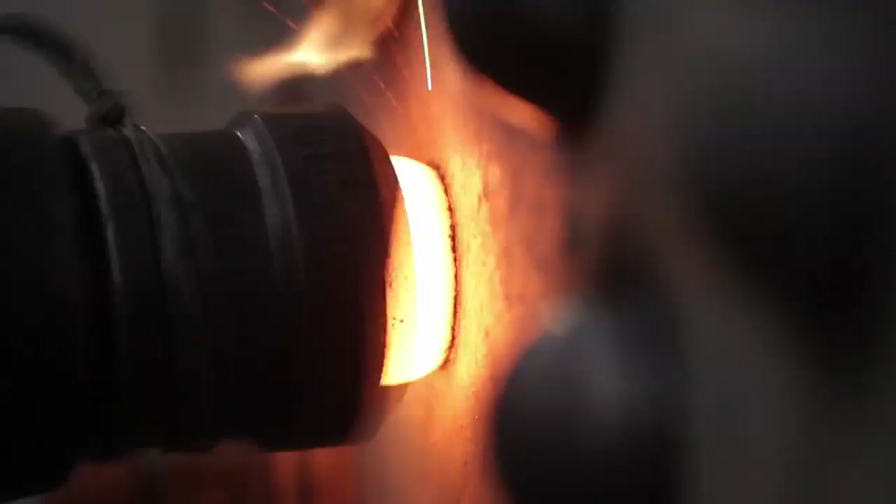But for any change to happen, you need a vision fueled by an ambition. Because everything happens twice, first in the mind and then in the world outside.

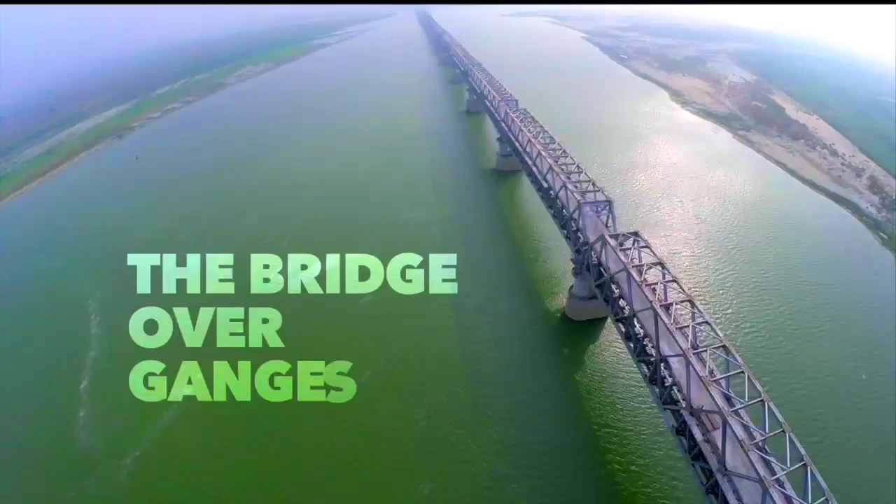The river Ganga, ancient, revered and sacred. Originating from the Himalayas, it reaches the plains, flowing merrily as it meanders its way through the Gangetic plains. By the time it reaches Bihar, the Ganges basin has extended to about 700,000 square kilometers, and the river becomes a wide giant that separates the state in two.

With the passage of time, this divide has led to an unequal distribution of resources and opportunities in the state of Bihar. For economic potential to be tapped to the fullest, the need to bridge this divide has become critical.

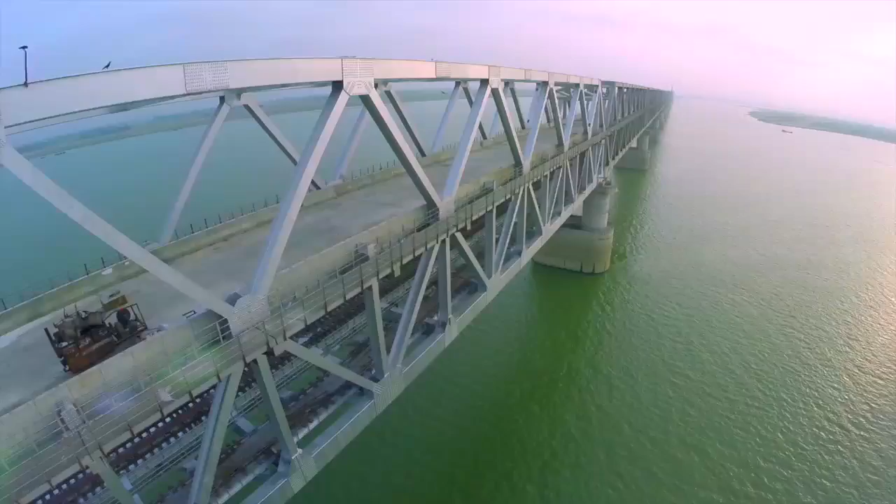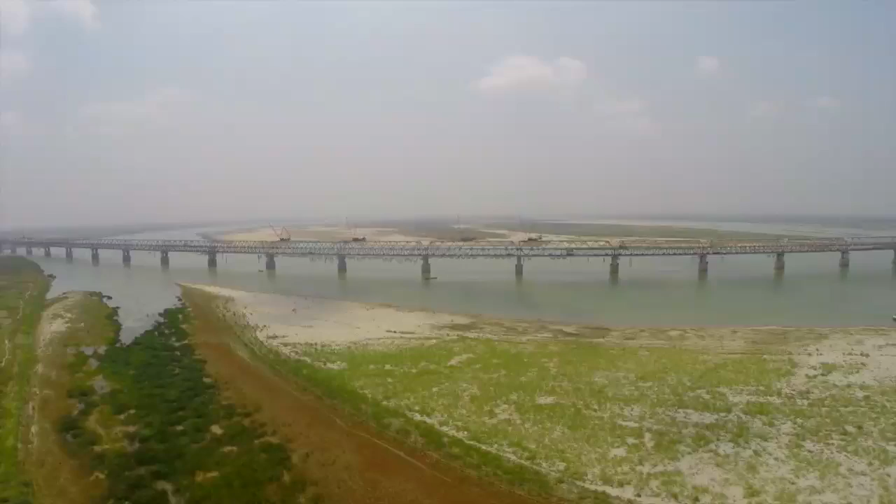36 spans of 123 meters, along with 2 shore spans of 64 meters each, and 2,200 tons of steel in each of these spans and 100,000 rivets. This is the longest and the heaviest superstructure on Indian Railways.

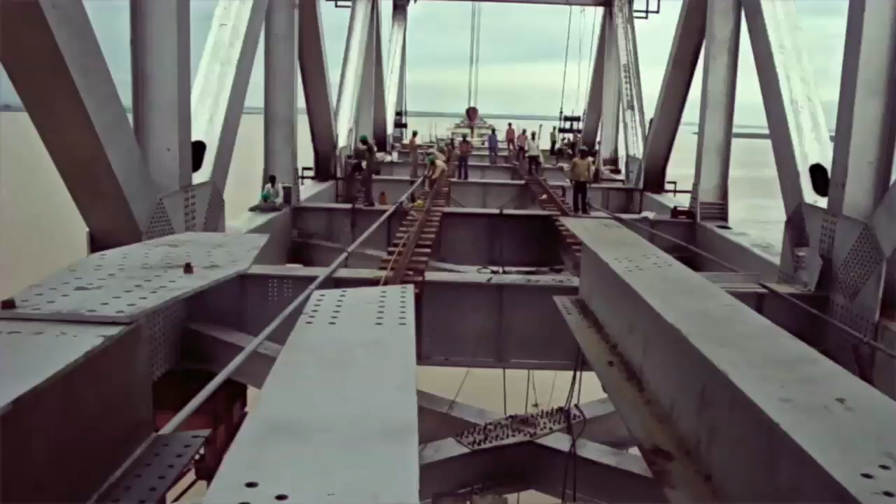The erection of the superstructure started in September 2010. Floodplains were reclaimed with boulders and earth filling to construct the first anchor span. And within a span of 4.5 years, all 36 spans of 80,000 metric tons of steel were mounted over River Ganga. This 4.56 kilometer bridge is Indian Railways' longest truss bridge.

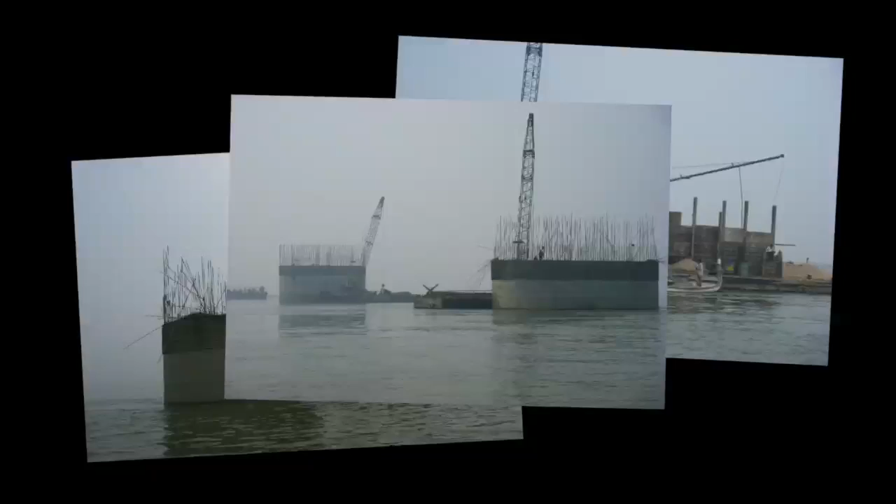The foundation laying had already begun in 2002. It was decided by the ministry to add a roadway above the railway track. By that time, the foundation and the substructure were already complete.

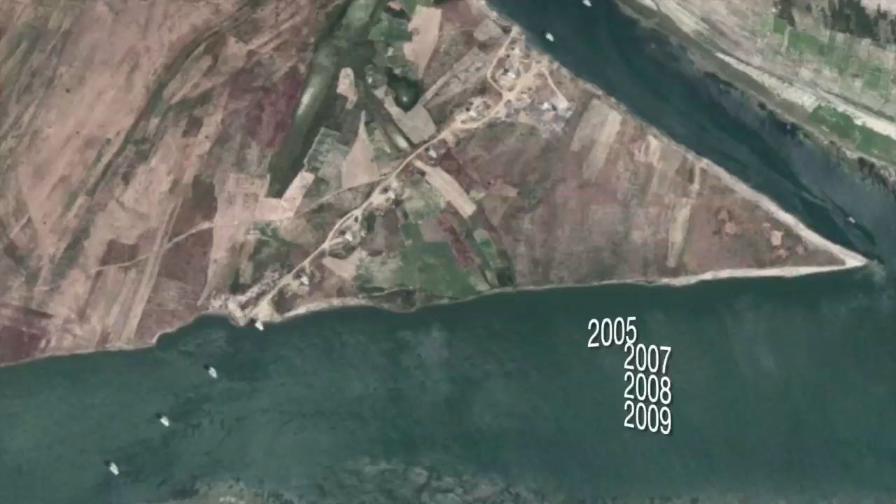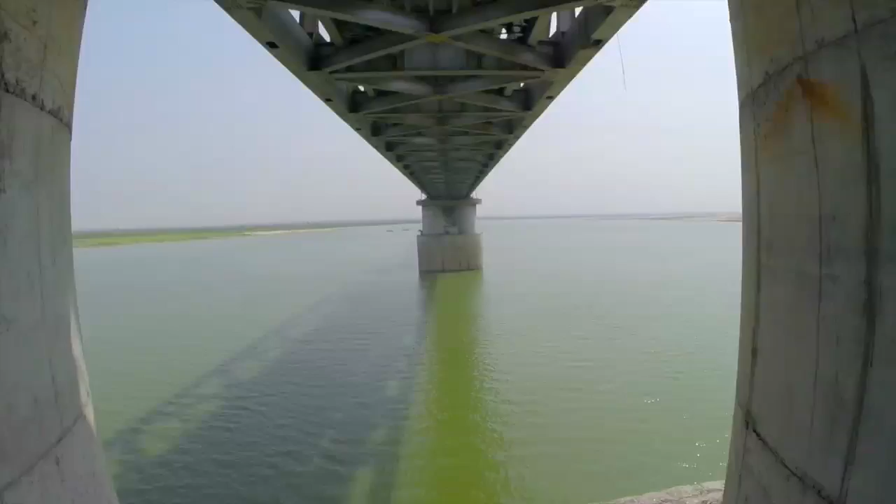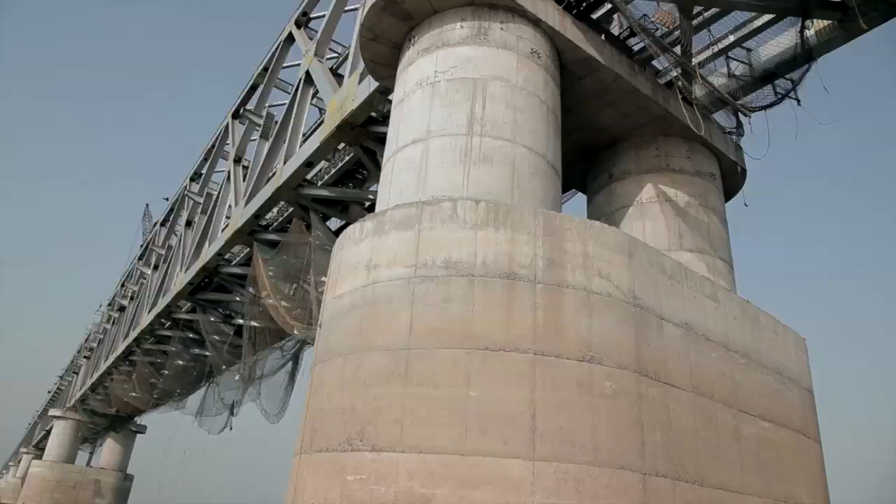This is the foundation portion, which is in the shape of a well, and the well is like this, in the shape of double D. We have twin circular piers of outer diameter 5.5 meter, having concrete thickness of 0.8 meter. Now the founding level is -8, so the total depth is almost 60.5 meter, which is equivalent to a 17-story building.

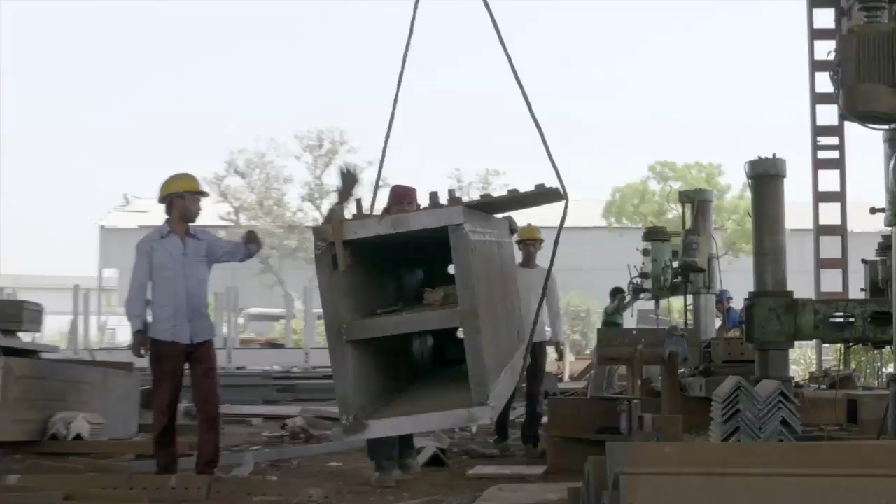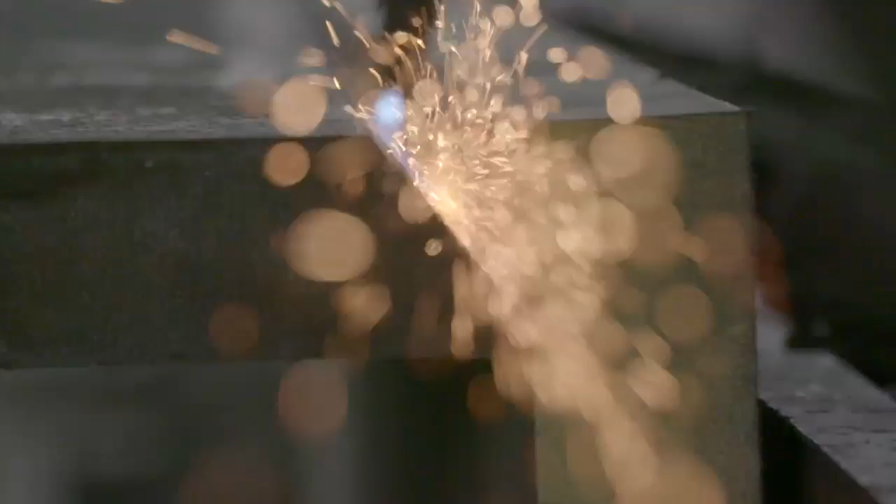To optimize the steel work, we had to go for higher grade of steel E450, so that the overall tonnage of the steel could be reduced and the dead weight of the superstructure could be reduced. But nonetheless, we had to use members as thick as 62 millimeters. Fabrication with 2.5-inch steel plate was itself a task.

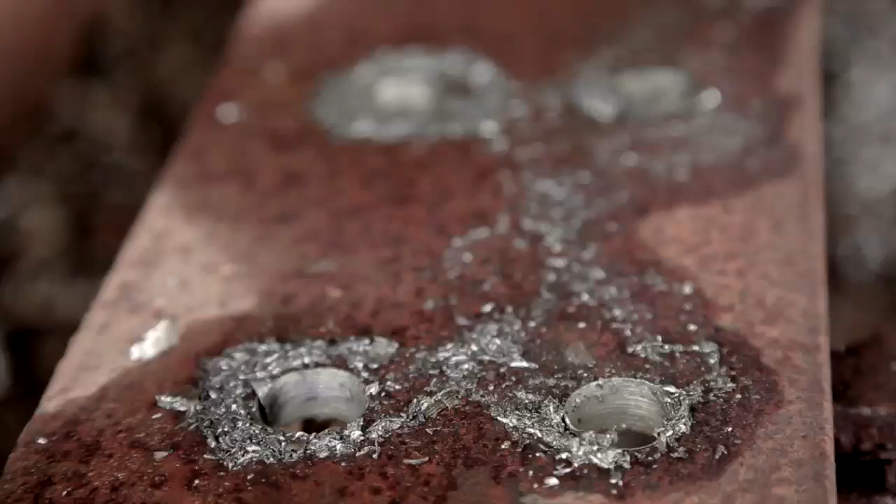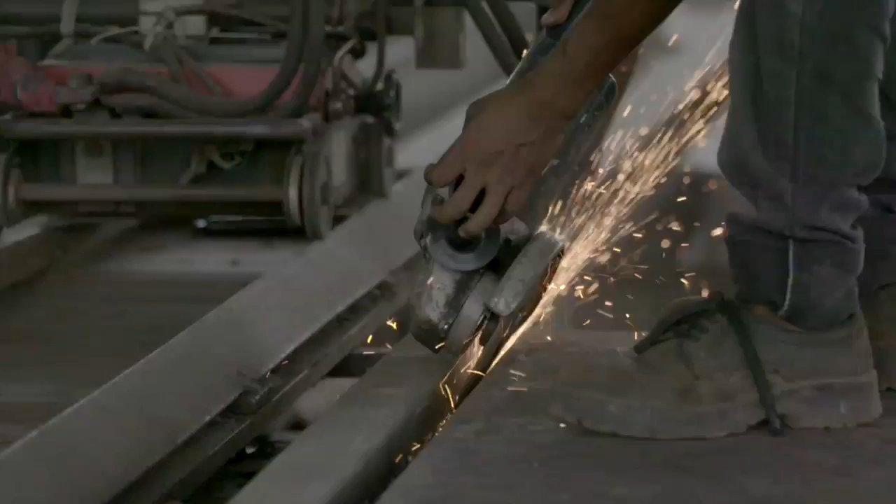Special radial drills and guide jigs become essential when numerous identical drill holes are needed in large numbers. The drill needs to be precise and absolutely correct in position. Once drilled, these plates will become part of a bigger steel component of the bridge superstructure. Then, these plates are welded to form a member of the steel truss.

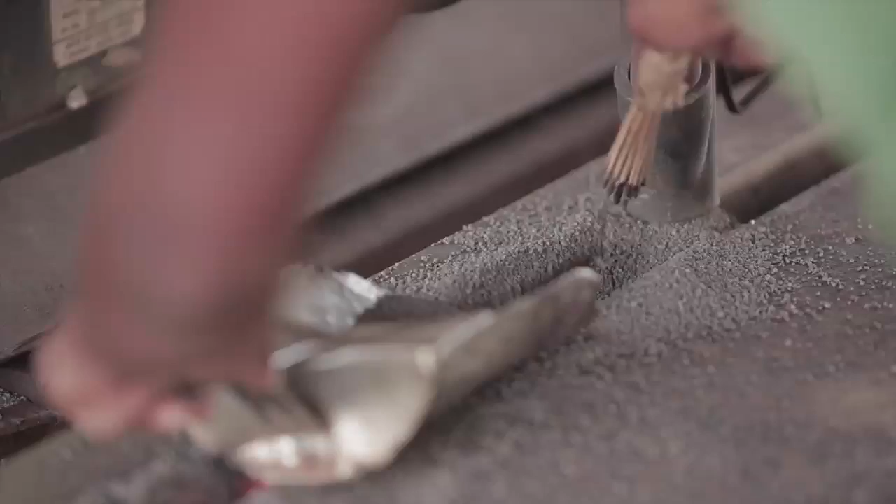A special welding technique, submerged arc welding, is being implemented. It involves formation of an arc between a continuously fed bare wire electrode and the workpiece. The process uses a flux to generate protective gases and to add alloying elements to the weld pool. When molten, the flux becomes conductive and provides a current path between the electrode and the workpiece.

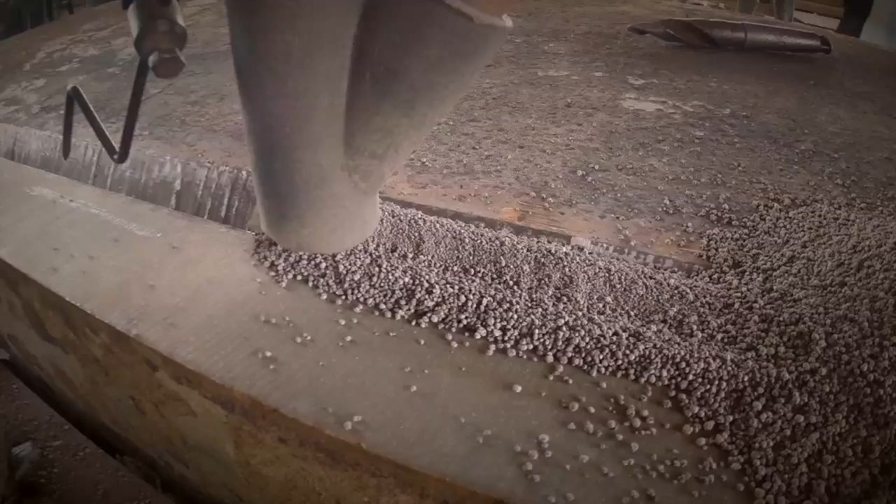The molten weld and the arc zone are submerged under a granular fusible flux consisting of lime, silica, manganese oxide, calcium fluoride, and other compounds. This prevents any atmospheric contamination. Since the operator cannot observe the weld pool, great reliance must be placed on parameter setting and positioning of the filler wire. As the arc is completely covered by the flux layer, heat loss is low. There is no visible arc light, the welding is spatter-free, and there is no need for fume extraction.

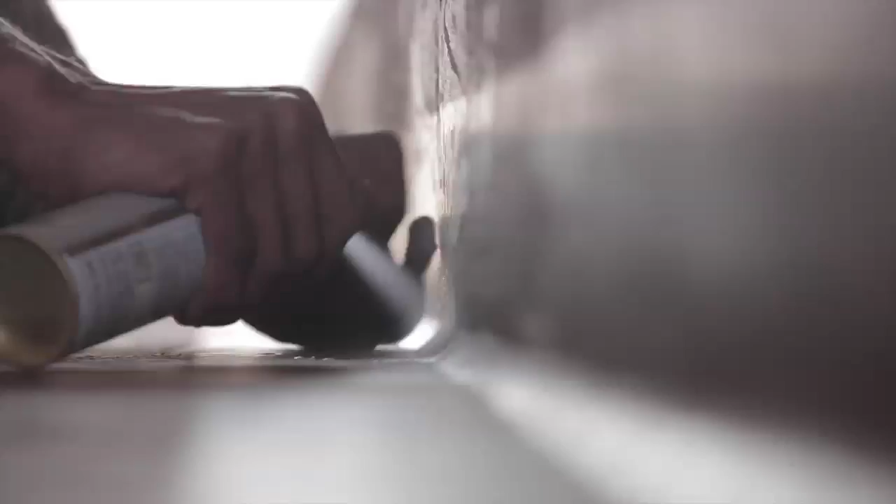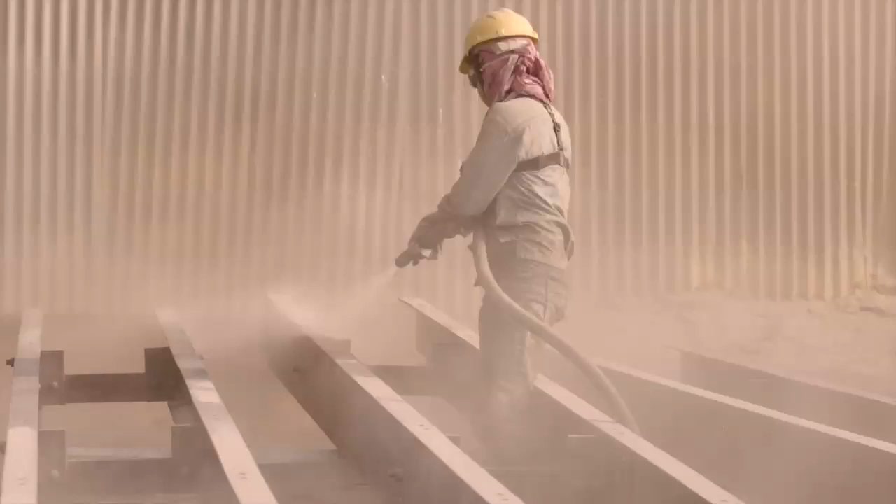Once the steel is welded, it is thoroughly checked for perfection by dye penetrant testing. Here the white color shows the weld is seamless. The prefabricated steel components are then sandblasted and metallized. Sandblasting involves propelling very fine bits of sand at high velocity to clean the steel surface. Once sandblasted, the steel is metallized with a coat of aluminium. This will provide environment and corrosion protection to the steel for decades.

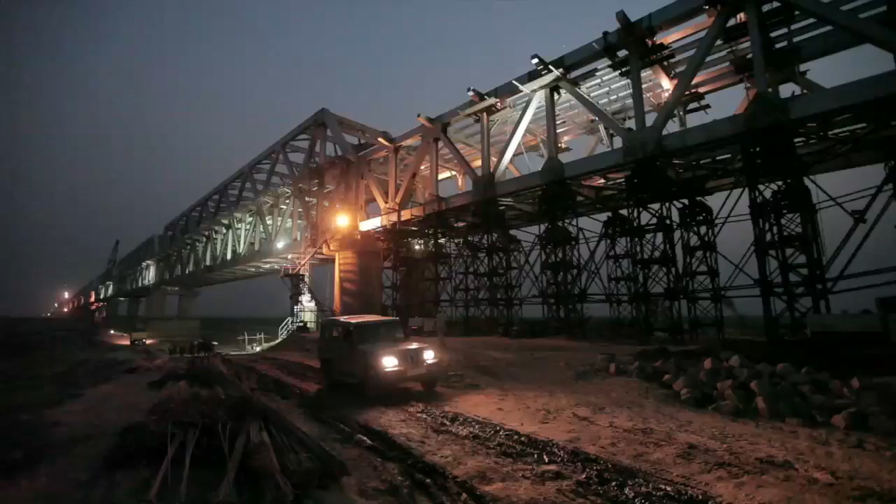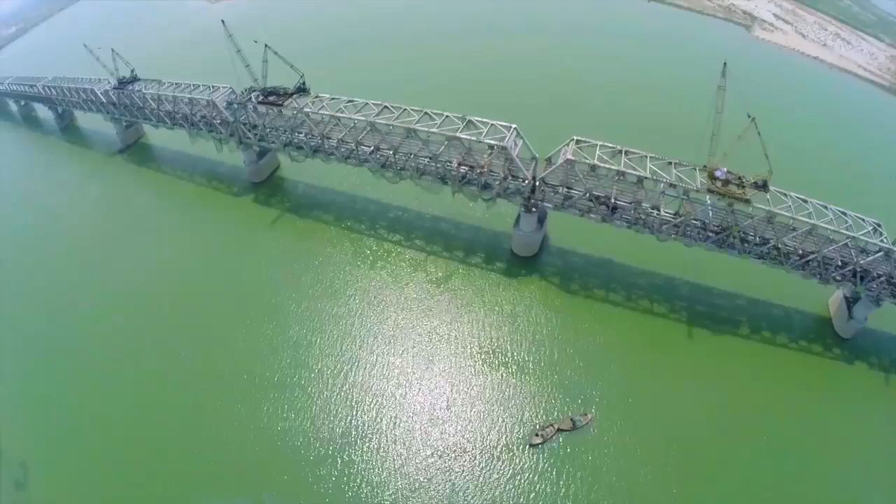The steel truss cantilever bridge was a major engineering breakthrough when first put into practice. It can span distances over 460 meters and can be more efficiently constructed at difficult locations by virtue of using little or no structural reinforcements. The construction begins with one span on ground. This serves as the anchor span for creeper cranes mounted on top of the steel superstructure.

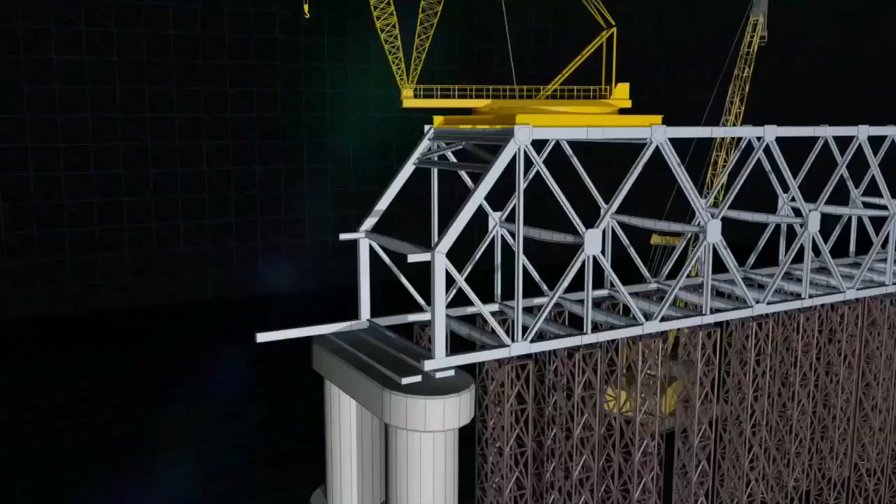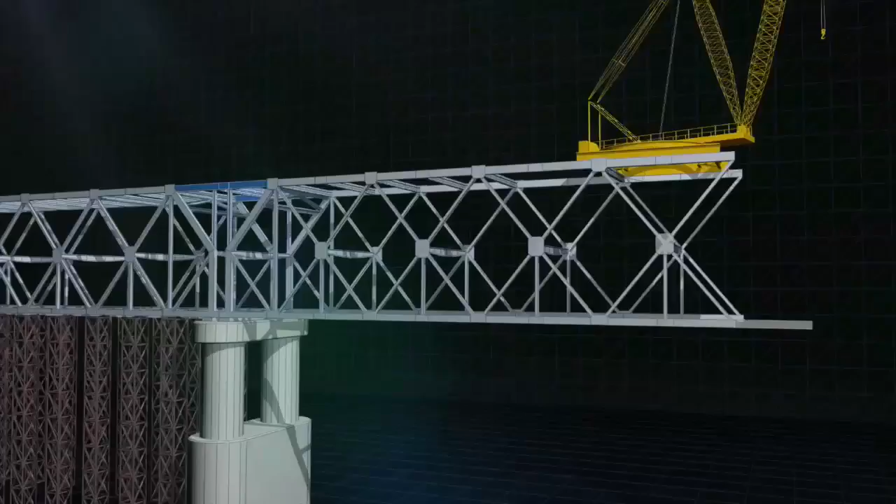Supported by a link member which holds the free end, these cranes build the next span member by member, launching ahead without any other propping from the ground. The cranes move on top, along the truss structure, adding one member at a time, forming an entire span from the free end, and land on the next pier.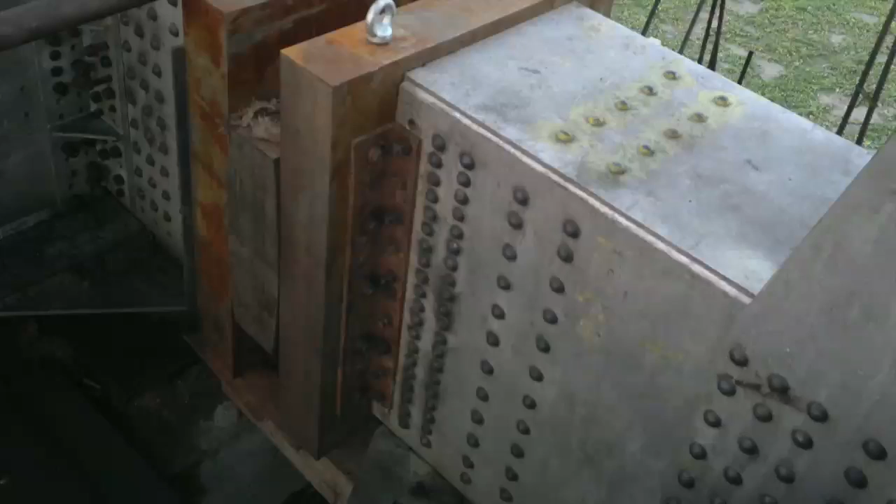Before cantilever launching of a new span, the bottom chord of the new span is blocked for any backward horizontal movement. It is done by inserting a buffer block between the bottom chord of the anchor span and the bottom chord of the new span. The vertical movement of the buffer block is monitored to assess the vertical deflection caused at the far end of the new span being launched.

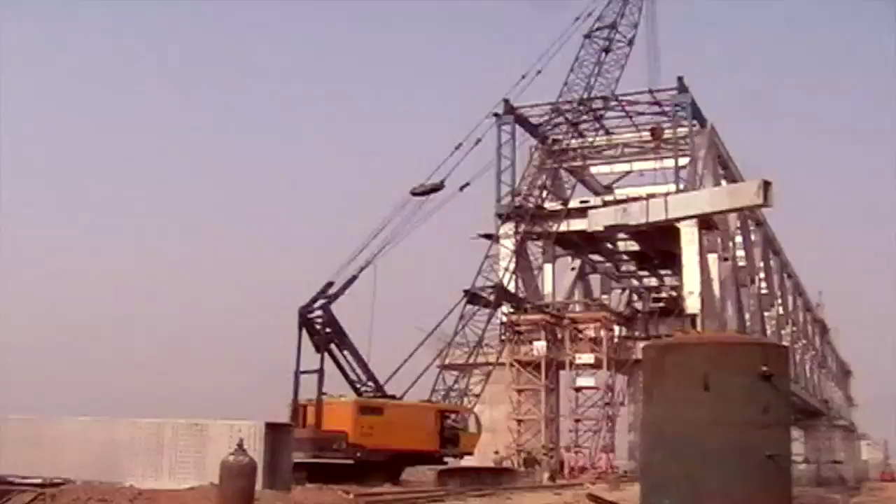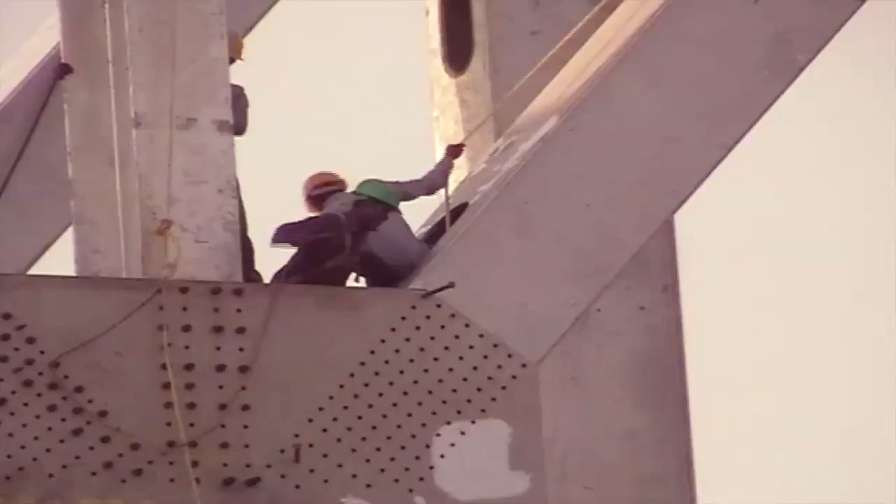For cantilever launching, the fabricated members were lifted to the rail level by ground cranes, then transported on temporary tracks. At the launch end, these members were lifted by cantilever cranes and fixed with drifts and bolts. On one single span of the superstructure, there are over 100,000 rivets.

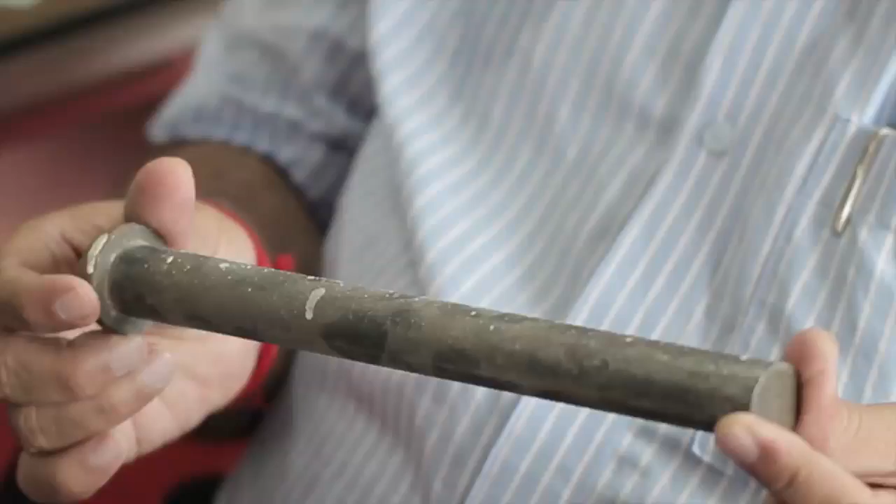फिर उतने दूरी तक ले जाना, फिर इसको ड्राइव करके हैमर करना, ये बहुत फास्ट होना चाहिए। A rivet is a permanent mechanical fastener. It is a smooth cylindrical iron shaft with a head on one end. The end opposite to the head is called the tail. It is heated and immediately placed in a drilled hole.

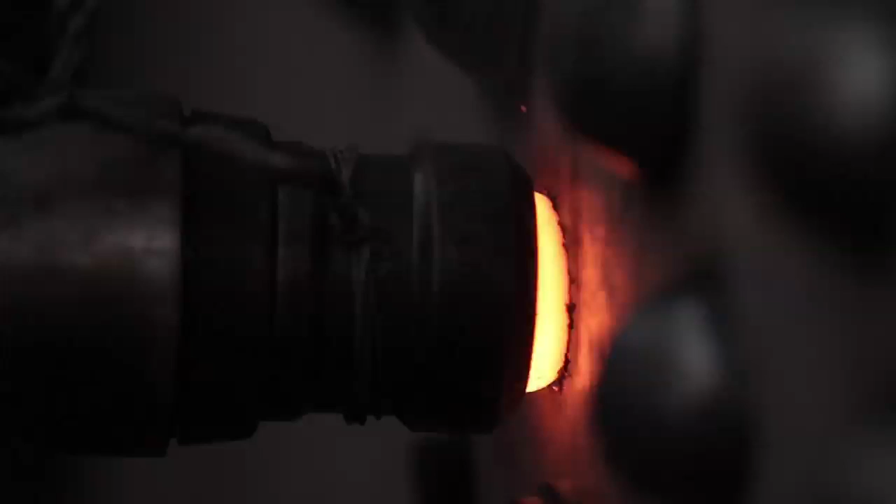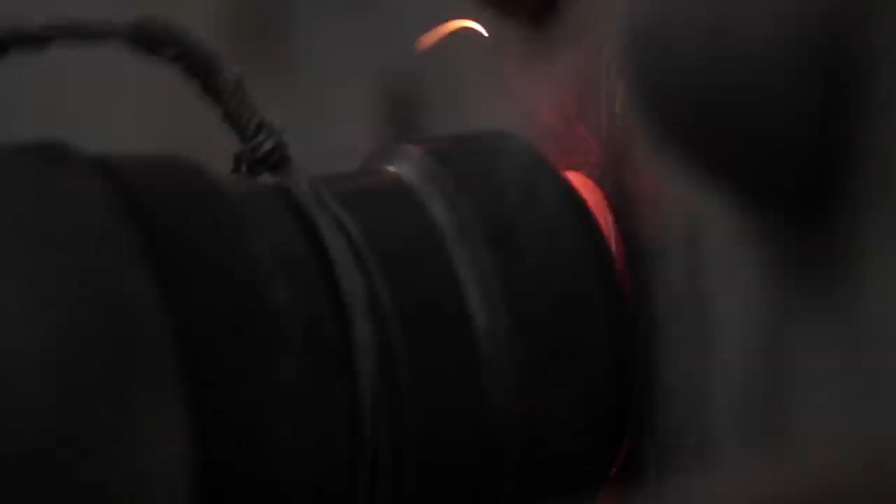And the red-hot tail is then pounded to form a new head. In other words, pounding creates a new head on the other end, resulting in a rivet that once cooled has fixed itself permanently on both ends. These rivets hold the steel components fastened together permanently.

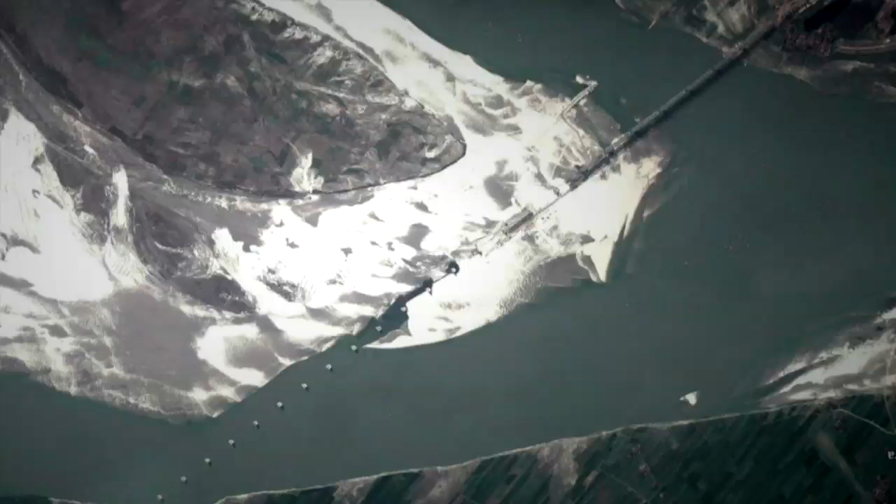In order to accomplish the task more efficiently, the engineers started construction from both sides and had plans to open a third front. But the forces of nature had something else in store for them. This island, before 2013 floods, protruded beyond this 11th span of the bridge, up to say 100 meters on the downstream side. And suddenly, in the floods of 2013, this got washed out. It was a very big challenge for us. Then how to continue with our ambitious plan of a third front?

And then we thought of a bigger barge. We brought a big barge of 1200 metric ton capacity, which carried material from the shore on the north end to the place of erection, and the entire material was lifted from the cantilever crane right from the barge, and erection was continued.

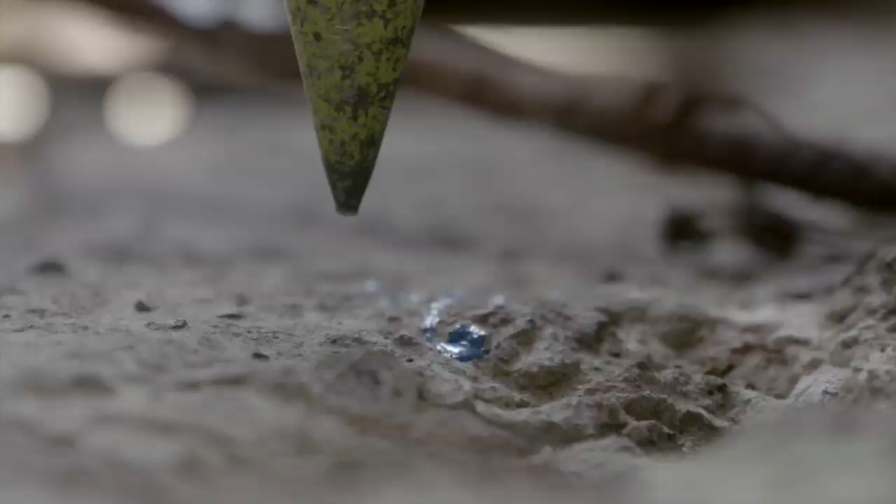And if the alignment of the truss does not match the central alignment of the bridge, the entire 2,240 metric ton truss will have to be shifted into alignment.

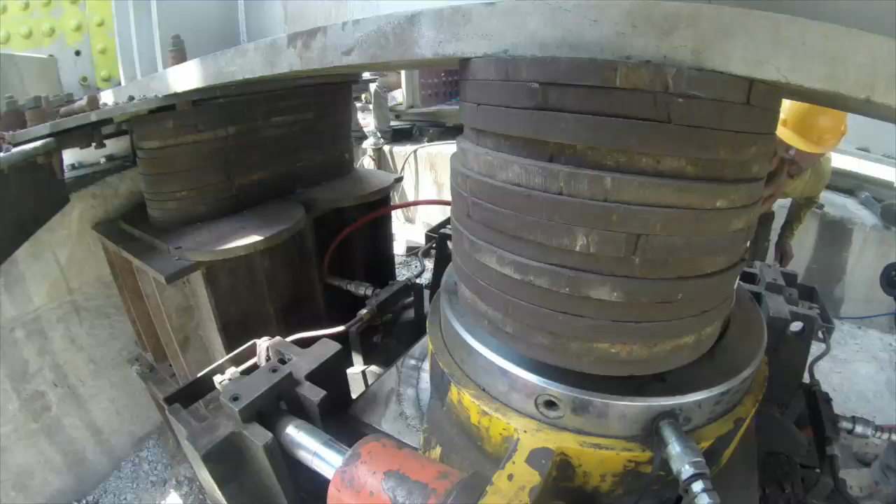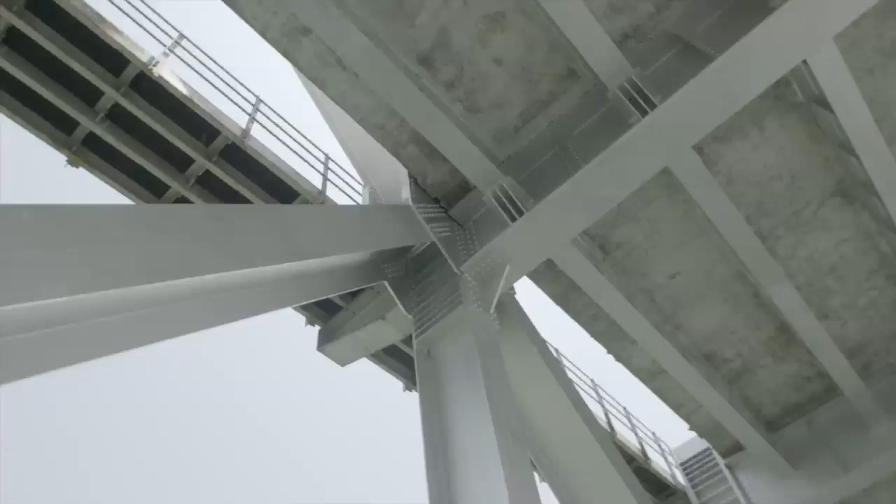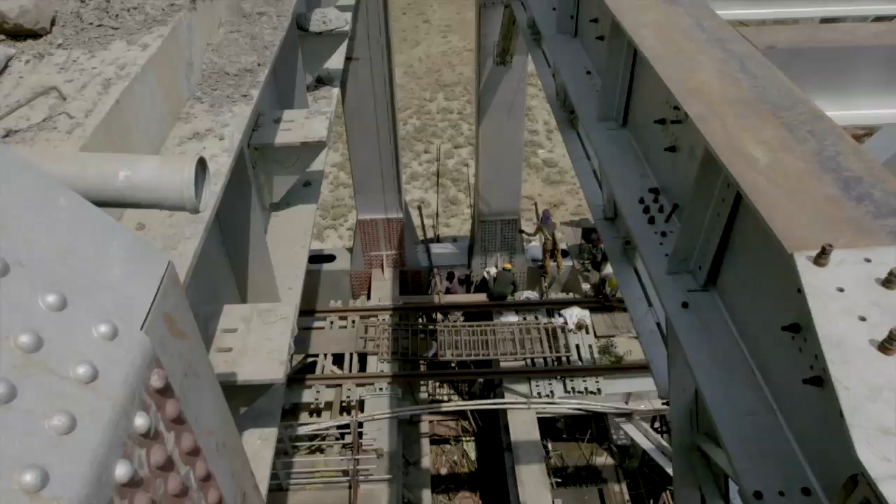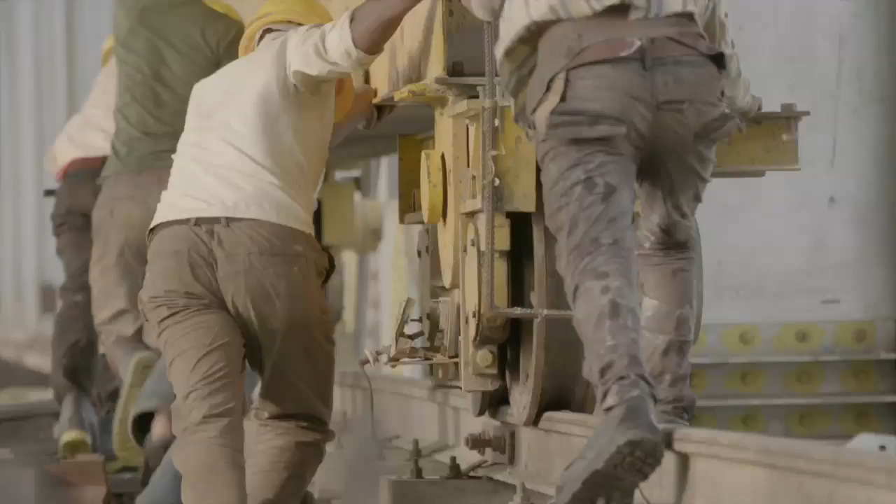To build a road deck on the second level of the steel structure, the engineers had an unprecedented challenge. The concrete casting could have been done by providing traditional support reinforcements from the rail level below. But the engineers had to find a way that would not hinder the railway work and accomplish both tasks simultaneously without affecting the other. Generally, we use props from ground, and using props from ground would have hindered the work. So we devised a method which does not use the support system.

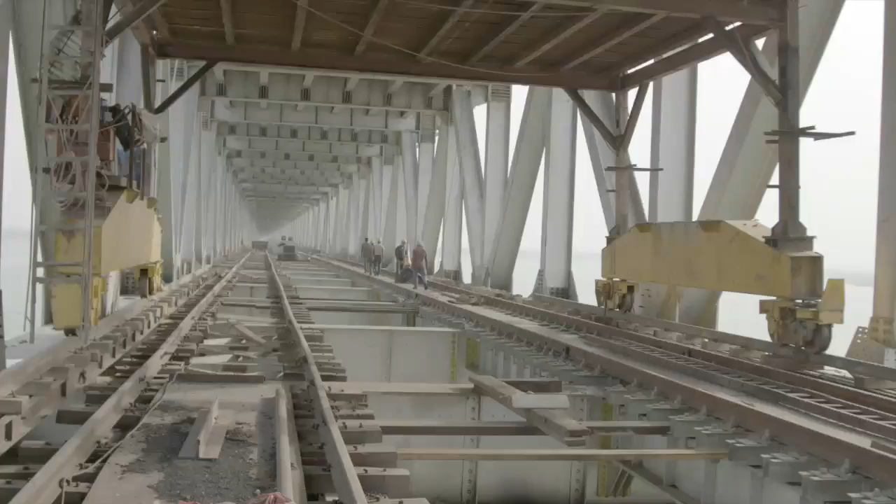As you can see here, there is a gantry, and behind me again there is a system which is independent of support from ground. So they developed a gantry that runs on the rails and holds aloft a large steel shutter that provides the support needed for the road construction above.

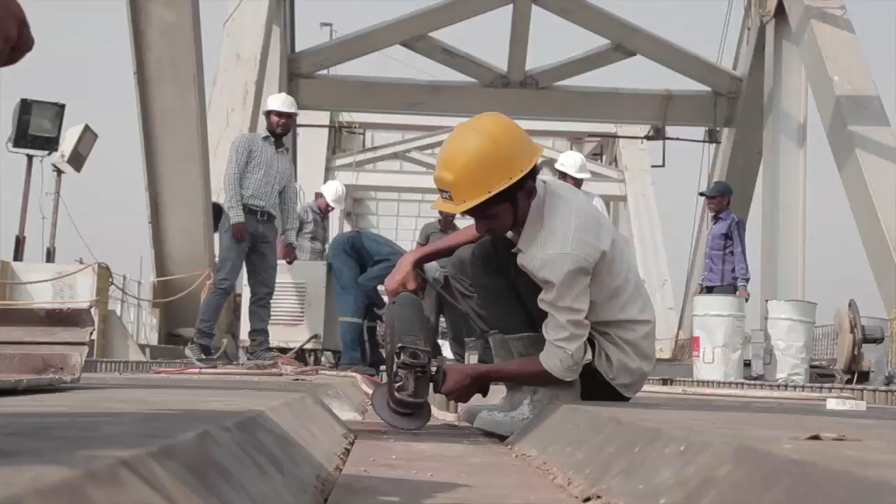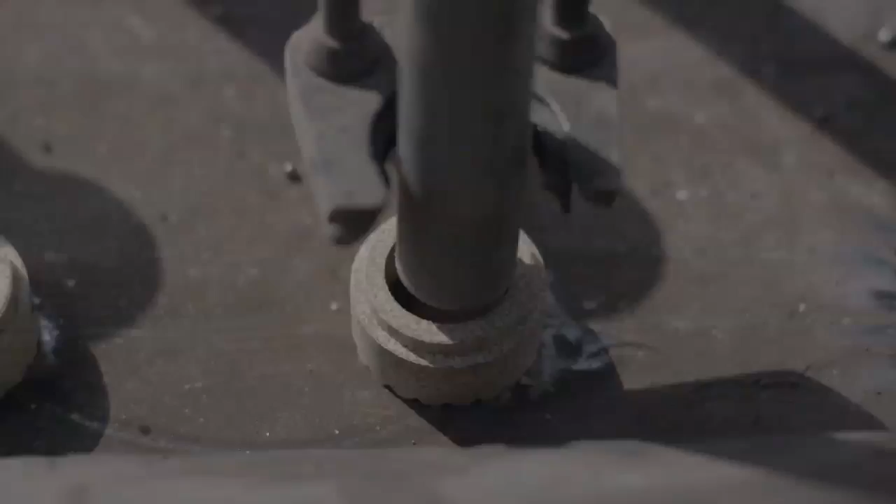On the deck, the shutter is fixed and the team is welding shear studs into the steel structure. These shear studs prevent the slip between concrete and steel structure and help achieve a much stronger bond. Shear studs transfer and balance the stress between steel and concrete in a composite structure.

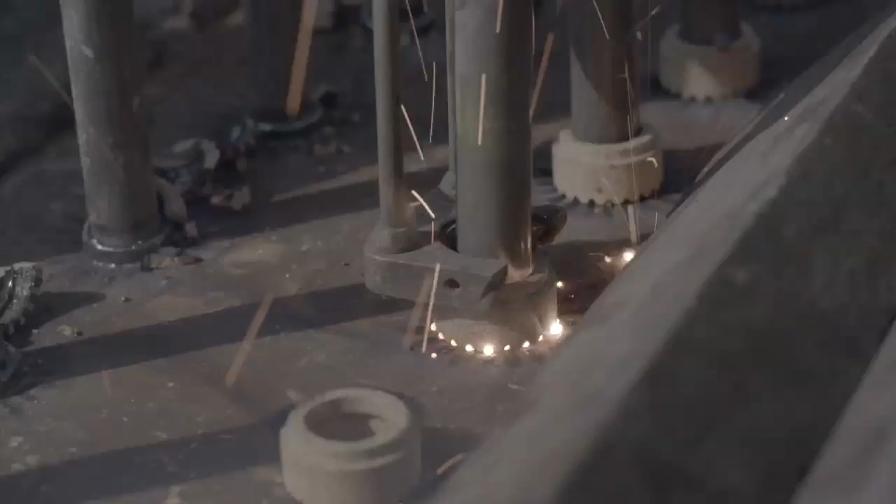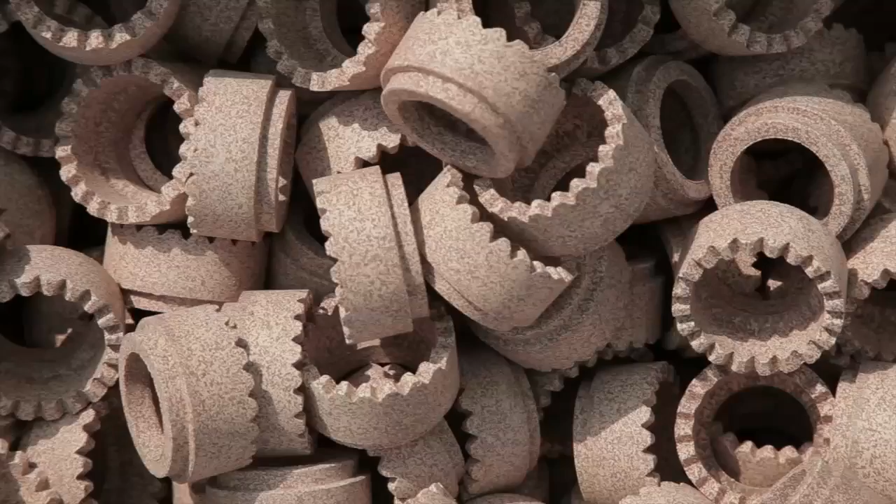Stud location and straightness of alignment of row over the steel cross girder and road stringers is marked with precision and care. Surface around welding location is cleaned by buffing wheel and made free from rust, dust and paint. The stud welding gun uses a type of flux called ferrule, a ceramic ring, which concentrates the heat, prevents oxidation and retains the molten metal in the weld zone. The ring is then broken and removed.

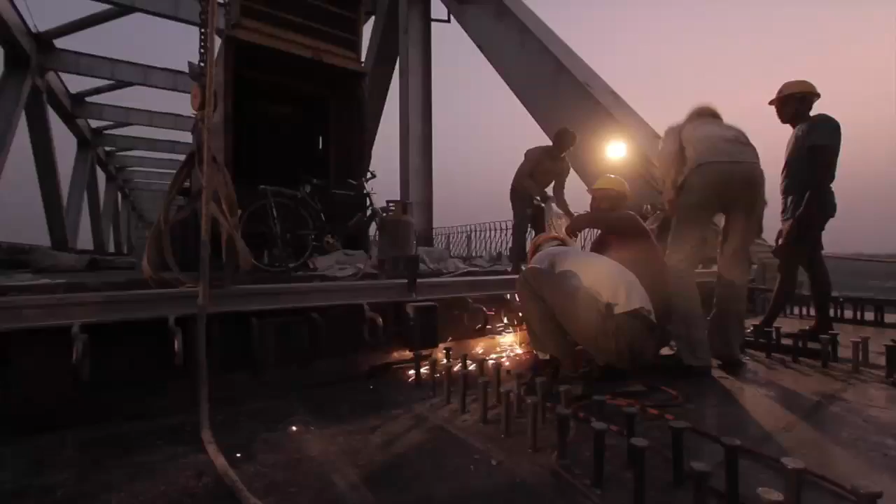An expansion joint is an assembly designed to safely absorb the heat-induced expansion and contraction of construction materials. It absorbs vibrations, it holds parts together and allows movement due to ground settlement or earthquakes. This joint greatly reduces the stress that would otherwise be caused to the main structure.

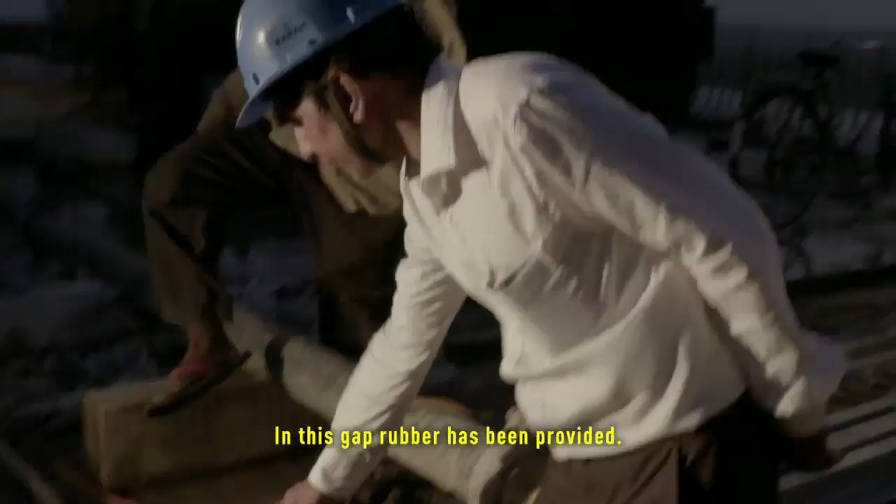Not even water. The first anchor span was erected on trestles in September 2010, initiating cantilever erection from the southern end.

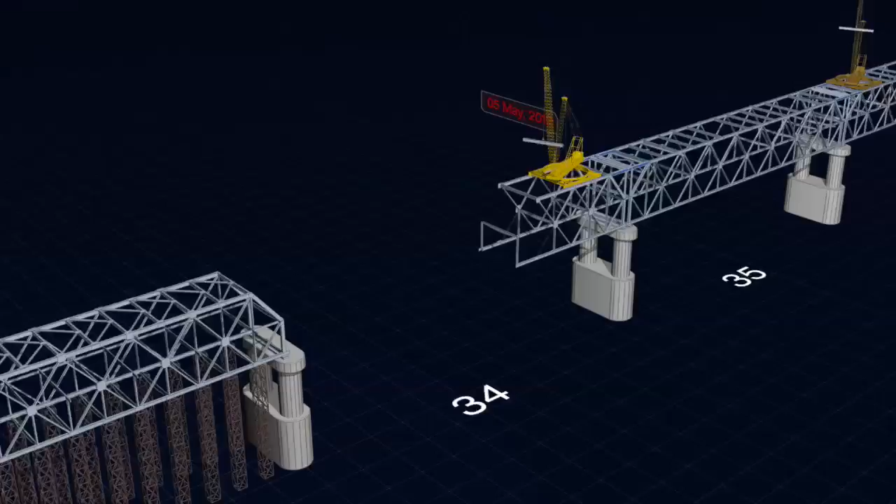While on the north side, the erection began in January 2011. Taking advantage of the dry weather, additional anchor spans were built wherever there was ground support. Even midstream, the span number 27 had a patch of land underneath, adding a third front for the cantilever erection.

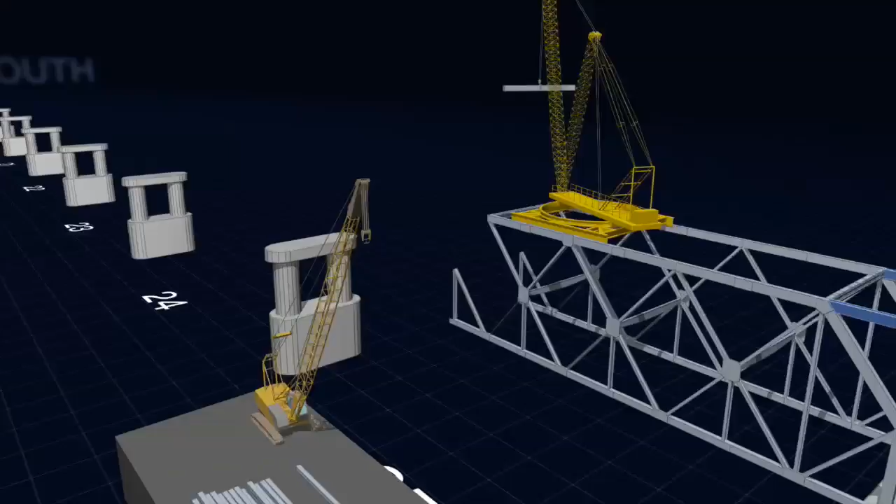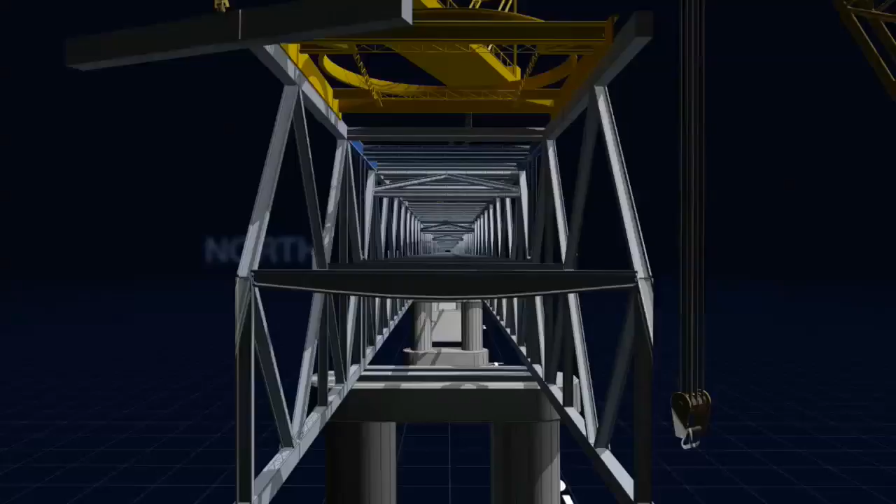But in 2013 floods, the land got washed away, so a floating barge was used to feed the material for midstream cantilever erection. This expedited the progress, and within 4.5 years, the erection of superstructure was complete. On 2nd of January 2015, when a bottom chord member was placed to bridge the last gap, the link between north and south was finally established.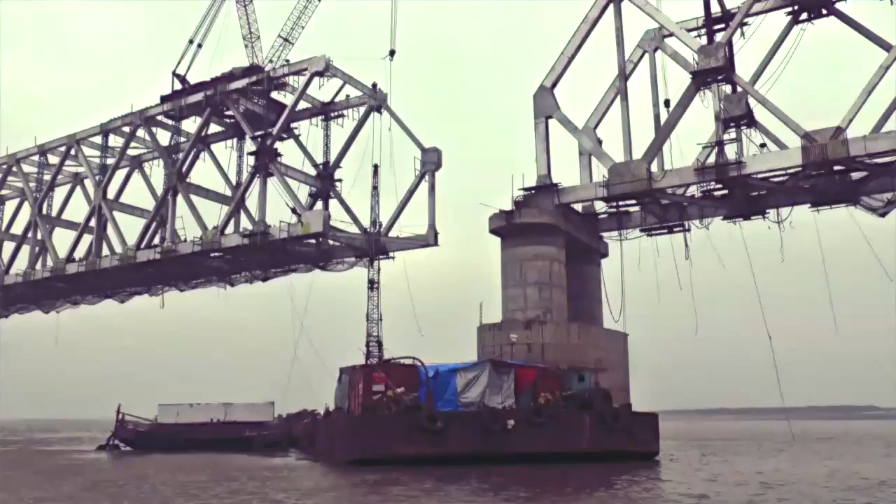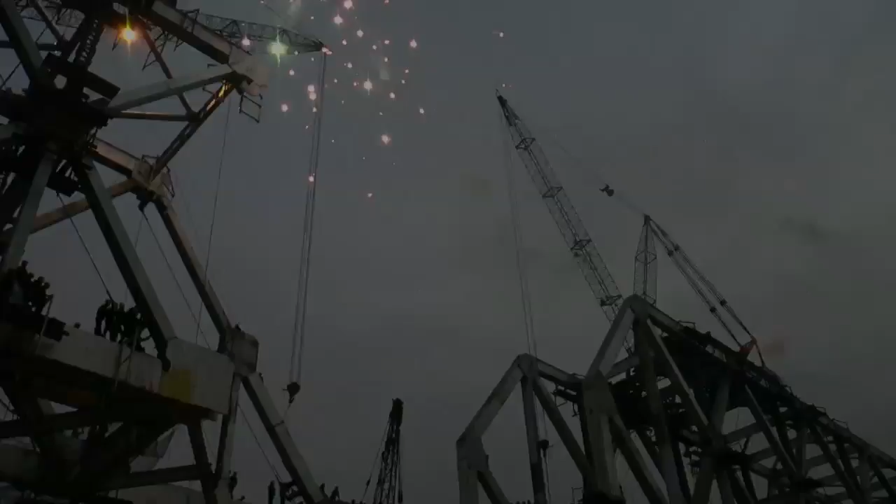Such kind of structures are not built daily or annually or every decade. Such kind of bridge may be a once in a lifetime construction, and I am fortunate that I have been associated with this bridge. Not many engineers will get a chance to be associated with such kind of a mega bridge construction. From technical point of view also, it is a feather in the cap of Indian Railways.

It is the longest rail-cum-road bridge in the country at 4.5 kilometer. Most of the fabrication is welded, and there is as much as 200 kilometer of welding which has been done for the bridge, and at joints we have provided rivets totaling almost 4 million. So these are all big achievements.

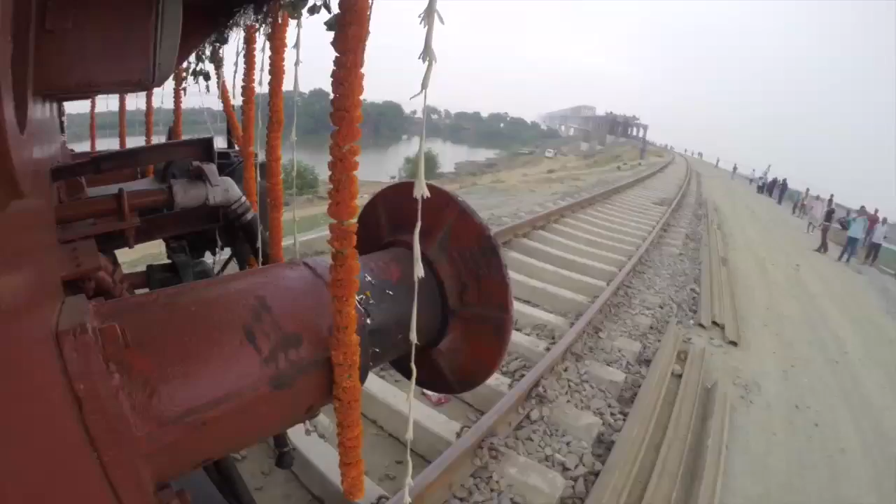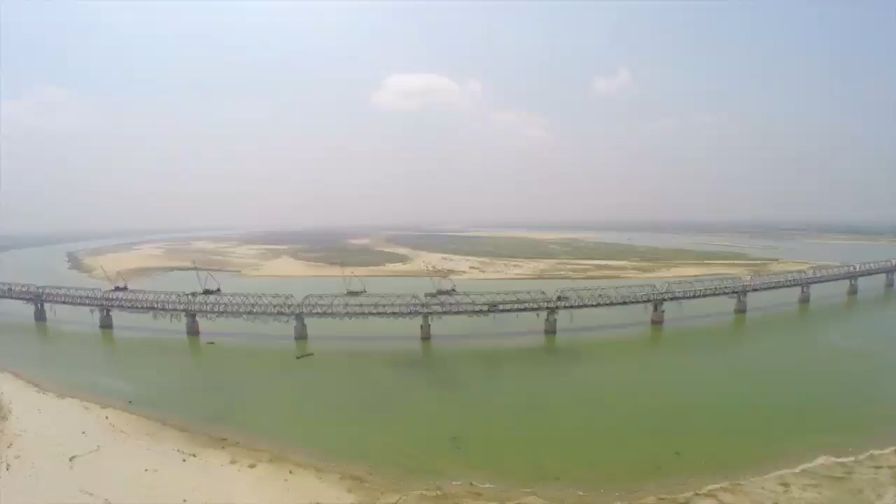Connectivity is the key to economic prosperity. When human resource is mobilized, unprecedented growth can be actualized. Job opportunities, agricultural exchange, tourism, increased productivity and efficiency are some of the immediate gains the bridge will deliver. However, homogeneous growth, decongestion of urban areas, and increased participation of villages to Bihar's economic growth will be the key long-term impact of this initiative.

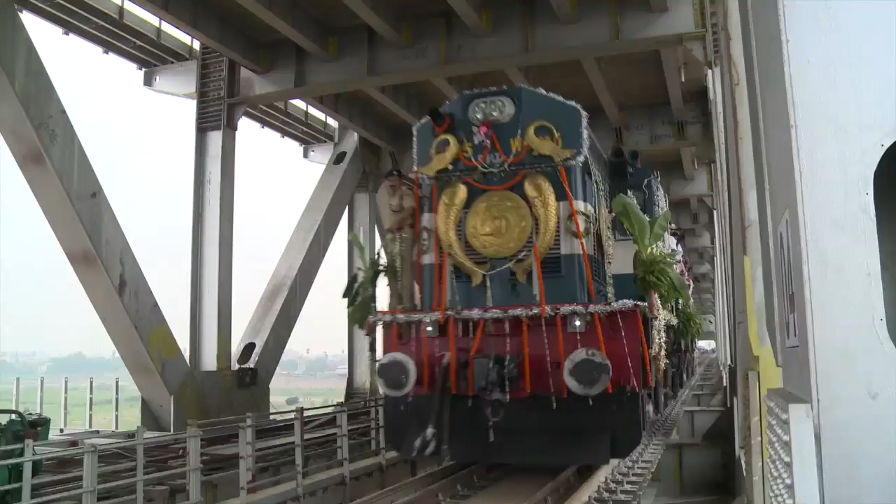Bihar stands on a threshold of a dynamic phase for growth and development. This bridge over Ganges, connecting Patna with Sonepur, will be a turning point for Bihar.